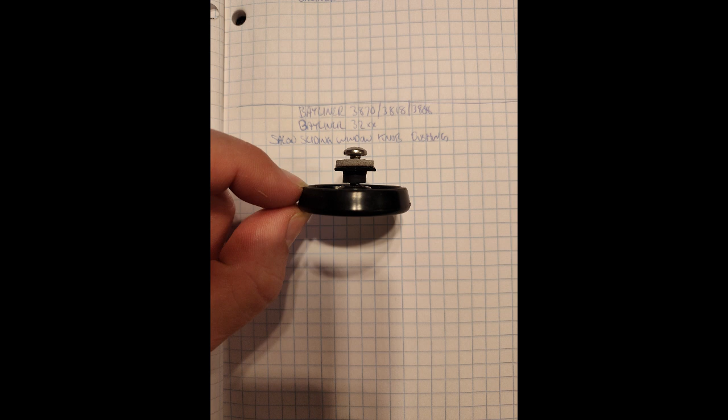The idea for this project actually came from the Bayliner Owners Club. People were discussing what they were using to replace their rotted out bushings and washers in their sliding windows. I ended up looking at mine and saw that mine were also in really bad condition. And by bad condition, I mean they were basically falling apart as I was taking them out. I did find a good one though. I got the calipers out, took a bunch of measurements, and then opened up Fusion 360.

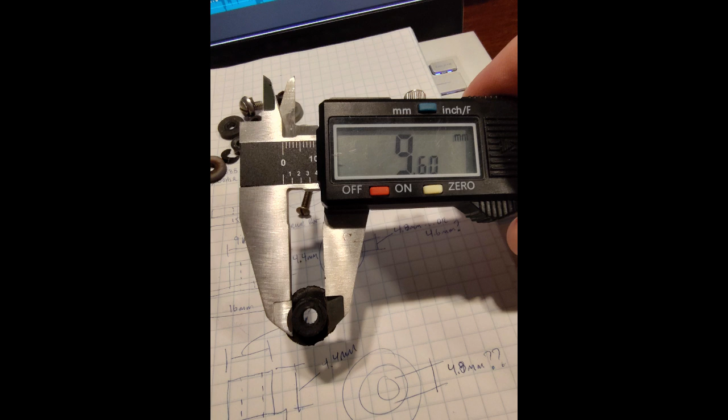Yeah, so when you're measuring existing things, especially something that's old and kind of rotten, I tend to overcompensate on the thickness of things, especially if they're soft, and undercompensate anything that is, say, fitting going through a hole or something that fit into another hole. And as you do more of stuff like this, you'll get a better grasp of how to compensate, and experience and everything will push you forward.

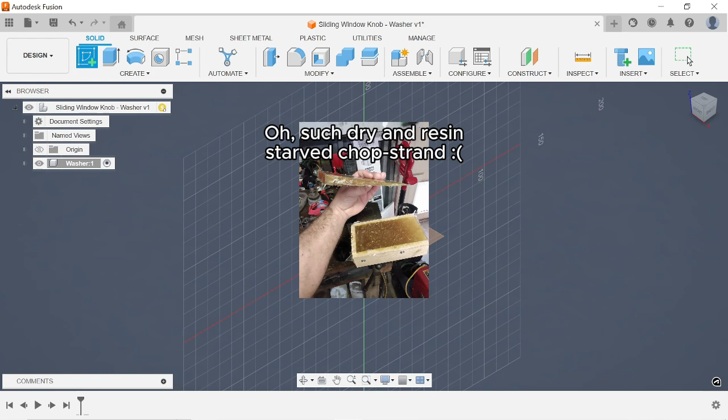Overall, it's better to have a little bit more than a little bit less because it's easier to take away. Something like casting resin shims for an engine mount, per se. You can always sand down and compensate for something that's already existing instead of having to recast.

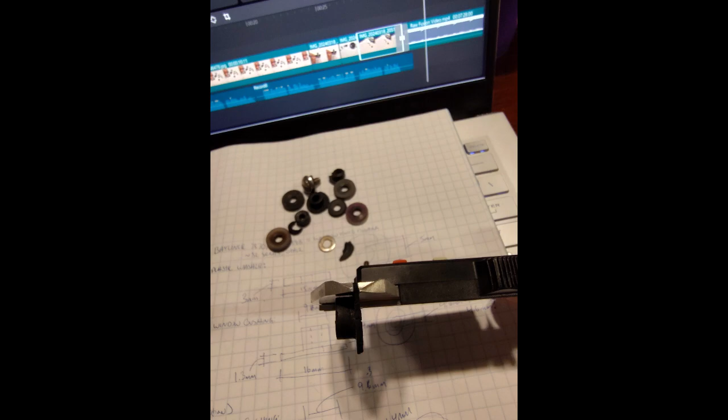So, another bit of advice that I'd give is take an average of thicknesses and diameters and widths across the surface of something that's kind of rotted. Average those out, and then generally I add roughly about 10%. That seems to give me enough extra material to play with, and like I said before, it's always better to have a little bit more than a little bit less. You can always take away, it's really, really hard to add.

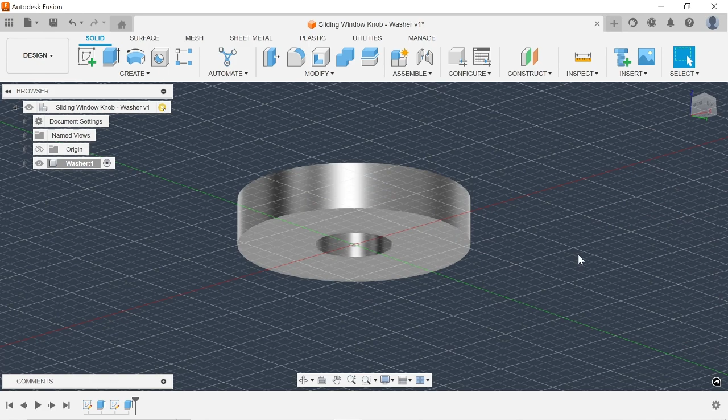Though with the 3D printing, it's been really nice. I can print something out really lightweight, test fit it. If it is not perfect or if it needs to be adjusted, I can adjust it in the program and reprint until it's damn near where it needs to be.

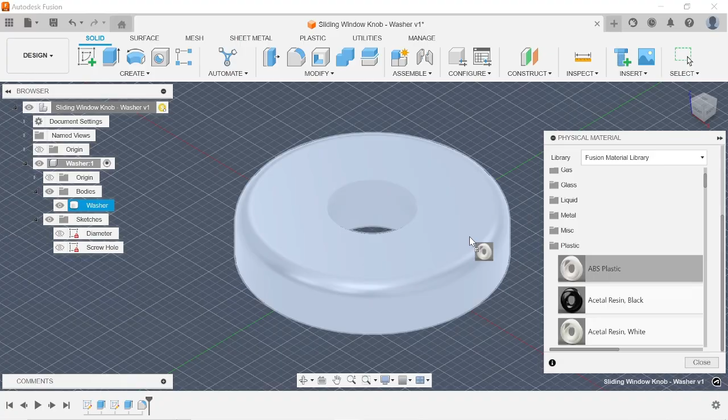After a little bit of research, I decided to use white PETG filament. It's supposed to hold up very well to the weather. Sun exposure is good, water exposure is good. Won't degrade and fall apart like PLA is supposed to. It's also pretty strong, and I actually like it a lot better for printing because it just seems to flow better, which is hard to explain if you've never actually 3D printed anything.

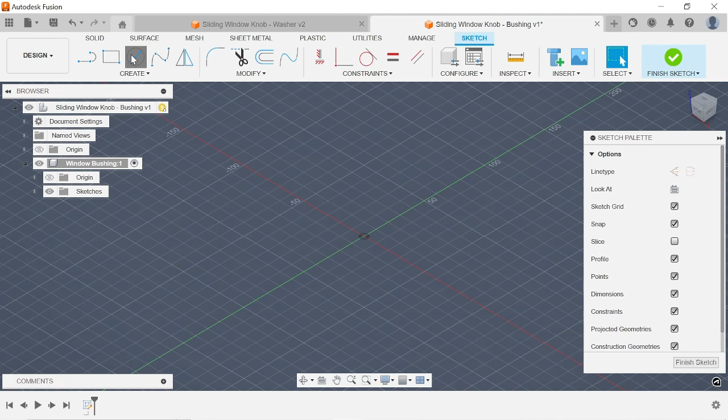I chose white initially because the only existing washer that I found that was still in one piece was, well, white. Turns out that was nearly 4 decades of UV exposure had completely degraded what was originally a black washer. So, of course, I did this and printed off a whole batch of them before I found an OEM one that was still in good condition. So, no reason that these can't be printed in black. I have the white on the boat now, and actually, I think it looks a lot better.

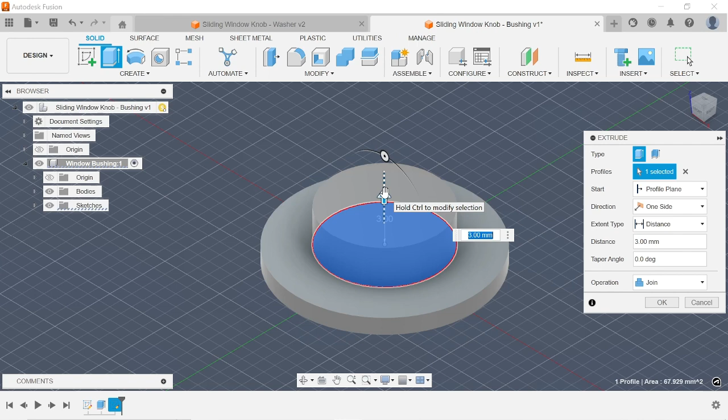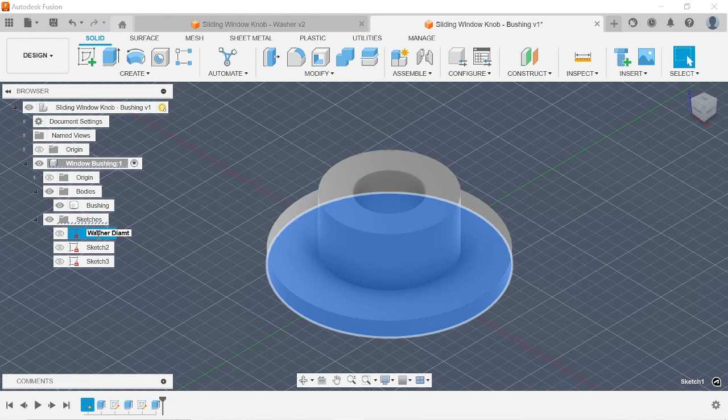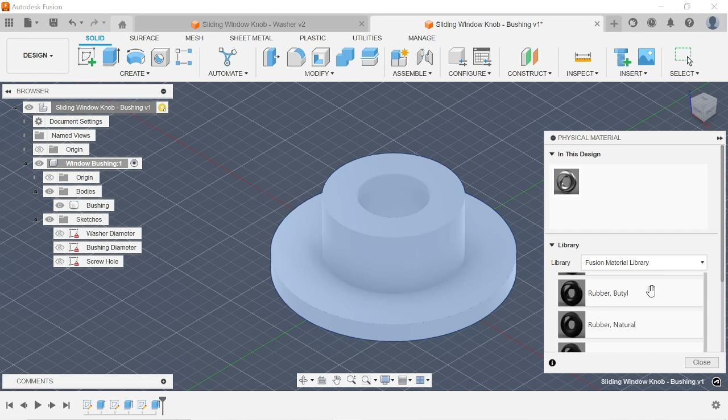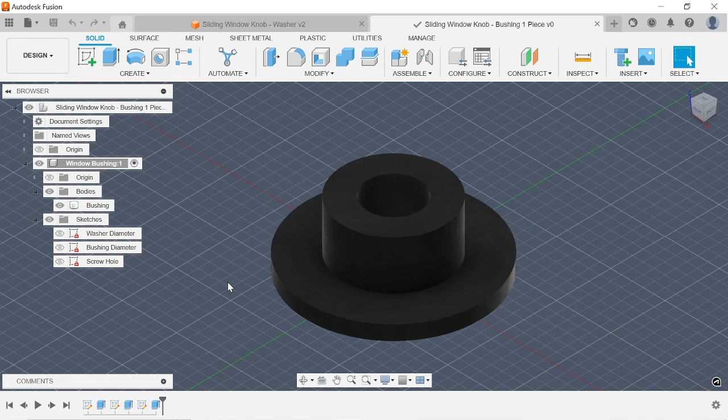The washer and the bushing represents the OEM kind of style. I also went ahead and did a thicker rubber bushing, a printout of 95A TPU that would eliminate the actual washer itself. You would just have to put a small stainless steel washer under the screw when you screw it in. I opted to go for the OEM look. Eventually, I'm going to have these files available for people to download and print these out themselves. So there is the option of a single bushing for whoever might want to do that.

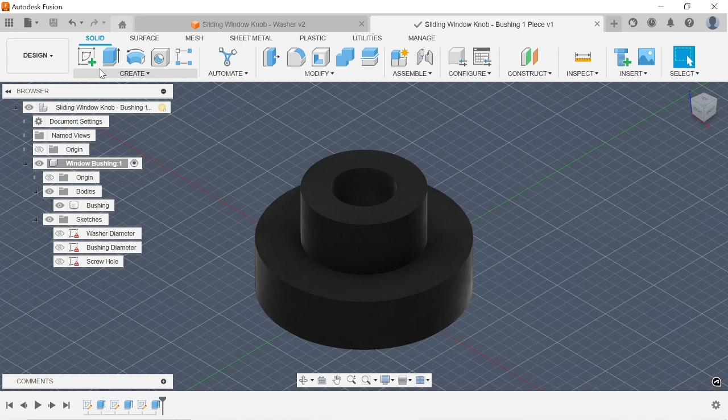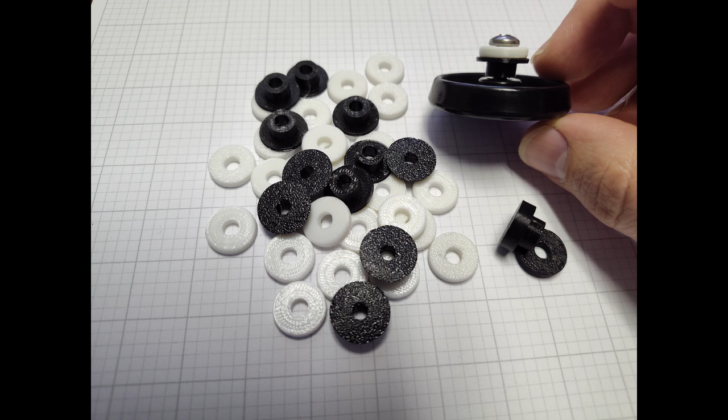And of course, here is that original pile of white washers before I discovered they were actually black. They don't look half bad. Those were printed on a textured build plate. That doesn't affect the sealing properties at all. I ended up buying a smooth build plate to print off more of these, and then for other future seals or anything that I want to play around with.

Installation's pretty easy. The hole in the rubber bushing has a slight interference fit with the screw going through it, so as it tightens down, it will compress around it to seal the threads. But easily enough, screw goes in the washer, then that goes through the bushing, then you set that in your window inside the hole in the glass.

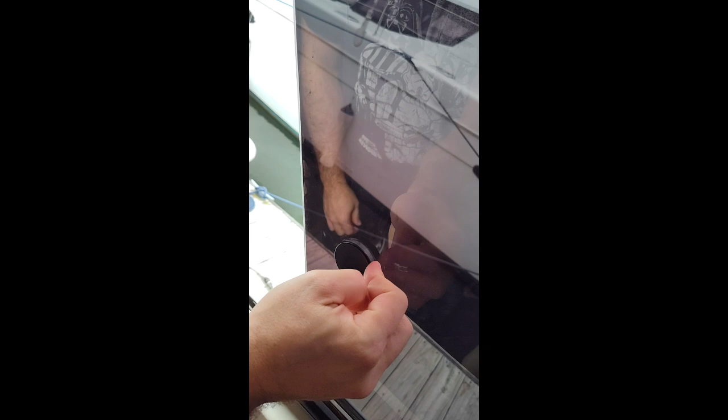And then on the inside, that's the little knob. Screw it down, hand tight, and there it is. Mission accomplished.

I hope you found this useful and entertaining in any degree. This is really video number one. Just dipping my toe in the water and trying to figure out how best to convey information that is helpful and usable for people that really have never done something like this before.